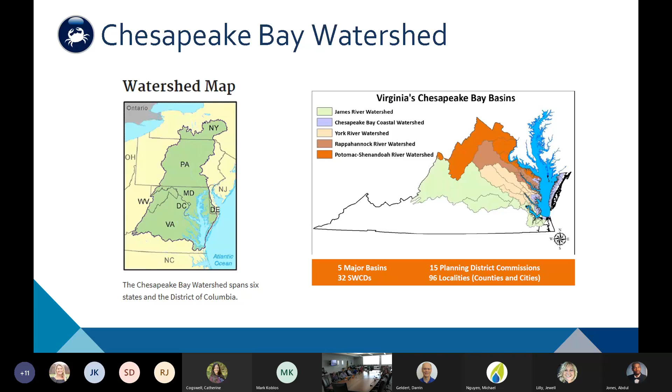When Virginia was given the ability to regulate this, they did it through a general permit for the state, and all wastewater treatment plants are given an allocation in that permit, with requirements on how they're going to monitor your nitrogen and phosphorus discharge, what kind of reporting you have to do, and how you might handle changes in your flows or loads over time. Every 5 years they renew this general permit, and as part of that, we had to provide a nutrient offset plan - our plan submitted to them. Everybody had to resubmit it at the 5-year renewal on how we're going to meet our waste load allocation.

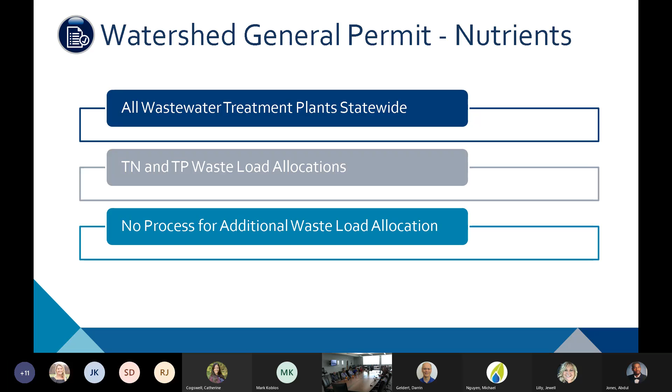That nutrient offset plan is also required if you're going to expand your plant. So if you're saying you're going to discharge more wastewater, they have a process that asks what's your plan to meet your waste load allocation. But there is no process to get more load allocation - it's how are you going to discharge more flow within the existing pounds of nitrogen and pounds of phosphorus you have. And this is really the struggle for Broad Run.

Right now we were given a waste load allocation based on 11 MGD flow, and this is truly flow discharged through the plant into the Potomac, so it's minus anything we're diverting to reclaim. Our plant right now has an 11 MGD capacity, but we discharge about 6 MGD. We're taking in about 8, but on average, anywhere from 2 to 3 are going to reclaim. So we're really nowhere near discharging our current waste load allocation, but we're building expansion to 16.5.

So DEQ has already asked us, well, how are you going to treat to these nutrient levels? Because we're going to allow you to build this. So we want to know how you're going to reach a 2.67 and a 0.067 on TP. Now, the state in regulation defines state-of-the-art technologies as a TN of 3 and a TP of 0.18. So we've already acknowledged to the state that Broad Run is exceptional, and yes, we feel like we have everything in place to meet this equivalent concentration, which we wouldn't have to do until we actually discharge 16.5 MGD. That is well into the future, but they wanted to know our plan when we built it.

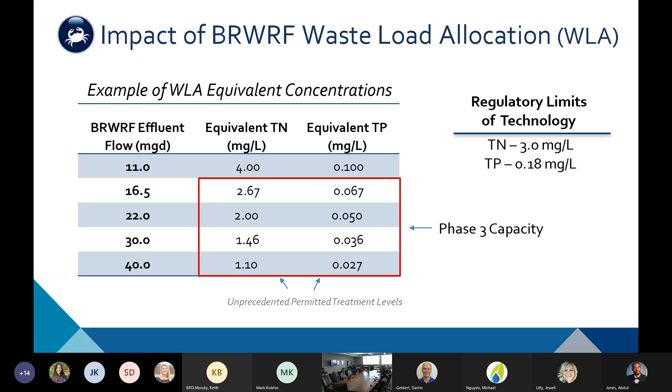We do think the timing is better than perfect. He's been trying to get this done. He's just so brilliant, forward thinking. He understands all this, he knows the area, he knows the region. What a perfect person to have there for a discussion like this. Just perfect. But you have to get through the staff to get to them. So we know how to do that.

I do have a question about the nitrogen. You mentioned organic nitrogen. So sitting here, we're surrounded, the atmosphere is 80% plus or minus nitrogen. So what kind of nitrogen are we talking about? Nitrogen compounds or free nitrogen?

So the permit is total nitrogen, and as the speciation of that is broken into ammonia, and then a small fraction that comes into a wastewater treatment plant as organic nitrogen. Most of what we focus on is dealing with the ammonia and particulate nitrogen. In the end, we convert that ammonia into nitrogen gas. We don't ever destroy nitrogen, but that's what we do. We go through a process that releases it into the air because it's no longer in the water, so the water can come out clean. That organic nitrogen is not part of that normal wastewater treatment process.

We do remove some of it because we have the granular activated carbon, and that is absorbing some of the organic nitrogen, but it is not enough to get our total limit down to anywhere below 1.5. And now that 1.5 still has a tiny bit of ammonia, like 0.1 or 0.01 on some days, a tiny bit of nitrate still left, but those add up real quickly into things that are 1 milligram per liter, because it's just such a low limit that you're having to hit almost down to 0, which is always where things get impossible.

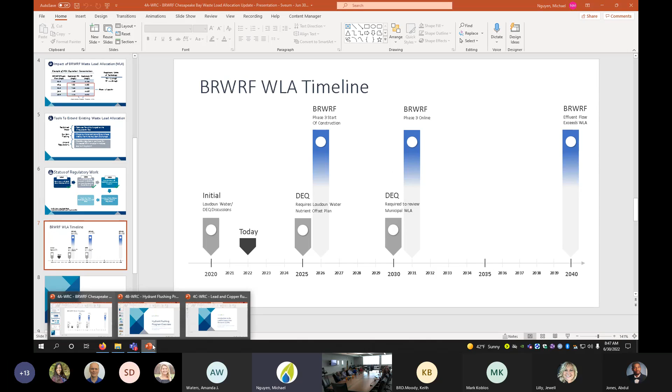I'll have a little more of a lighthearted presentation for you, which I think is a pretty fun one. So I'm going to share some information about our hydrant flushing program.

This is one of the most fundamental preventive maintenance programs that any water utility would have, just the most common type of program out there. But there's a lot more to it than meets the eye. So I'm going to share with you a little bit about this program.

So when most people think about water hydrants, they think about fire suppression, which is absolutely one of the most important uses of hydrants. But there are a lot of other reasons that these hydrants exist as well, and a lot of that has to do with our water quality.

As we're going through the flushing process every year, we are removing sediment from the line and testing the water quality as well. So this is a really important process for the quality, as well as ensuring that we've got the right amount of flow and water pressure to support not only fire suppression, but also our customers' needs and having the service that they need for their homes and businesses.

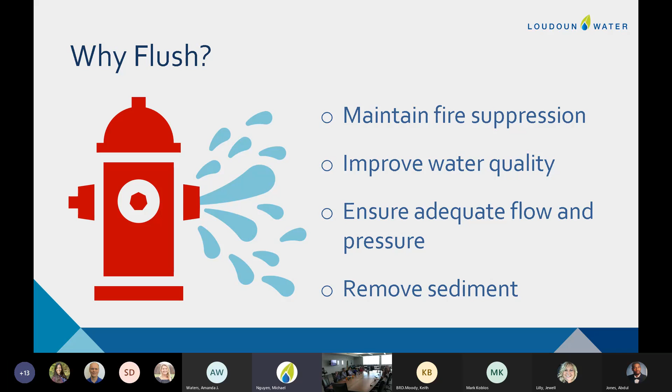One of my favorite things to do every year is find Scott on my street flushing my hydrant. This was something I was able to discover in person over COVID, which was kind of a bonus, being able to chase the trucks down the street and see what's going on. It's kind of like the ice cream truck coming for kids, but for me it's the Loudoun Water truck, and I get a lot of excitement there. So Scott's here flushing the hydrant, which is really fun. If you haven't seen this done in person, definitely chase them down if you see them. It is a lot of water, but it's for a good purpose.

So this video was really to give you an idea of what the hydrant flushing process looks like. There's a number of different steps that are really important when they're doing the flushing. The first thing they're going to do before they even open the hydrant is inspect it for any visual defects, making sure the bolts are secure and in good condition. If it needs to be painted or shows any other obvious signs of damage, they're going to inspect that and report any problems they may see.

They're also, as they're opening it, going to lubricate all of the threads. This is really important because if there is an emergency fire suppression need, for example, we want this to open and close easily and have the access that we need to the hydrant.

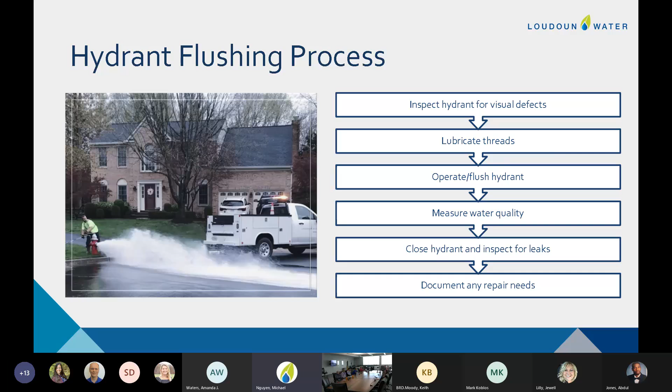So that was really the fun part with what it looks like. But I do want to share that we've got a lot of great tools behind the scenes that help us, when we're not there in the field, to understand how the program's working and to plan our resources. So we've got some great technology to support us. Our preventive and corrective maintenance activities are all stored in SAP, and now thanks to Power BI, we've got the ability to take a look at that data more easily and get good visual information a lot more quickly than we have in the past.

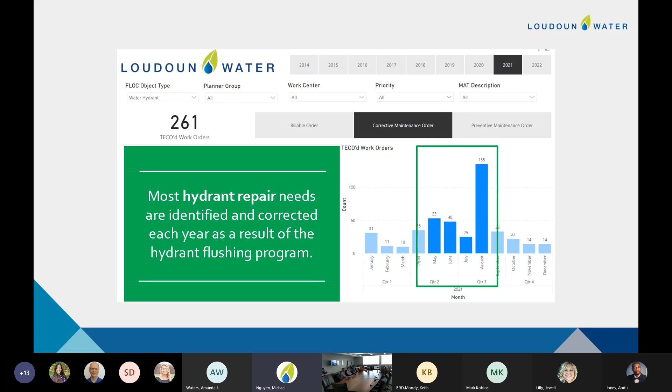We were able to get this done a little ahead of schedule this year, which was pretty exciting and a lot of fun, watching our progress move up every day, even having little internal contests to see who could flush the most hydrants. So we've got some top flushers, and we even have another board that shows the all-time high over all the years, who's the top. It's a pretty prestigious award and just a fun way to get excited.

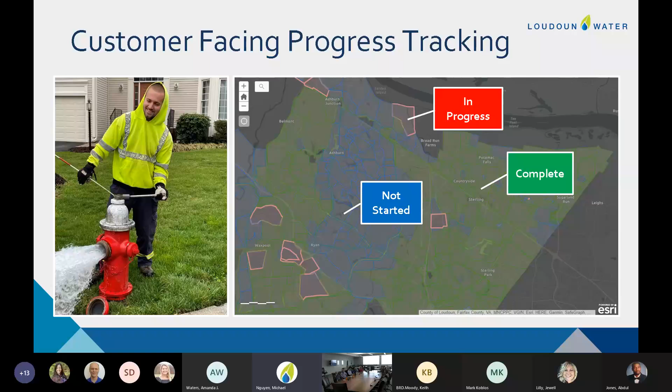Also great for our customer relations team to field questions that may come in through phone calls, to quickly be able to identify where our teams are. So also on the website, we keep frequently asked questions out there.

I would say these are definitely the most common ones that our crews get when they're out in the field, that I see on social media when people say, does your water smell like chlorine today? There's always something going on, so this really addresses the questions that are out there.

Just in case you're unaware of any of these answers, will flushing affect my water? No is the simple answer. If there's a team that's out on your street, you could have a minor blip in pressure fluctuation, but it's super temporary and doesn't affect anything that you're doing.

The chlorine odor and taste, some people are more sensitive to that than others, but we do change the chemicals from chloramines to free chlorine during the flushing season, both us and Fairfax Water. It just has a stronger smell and taste that's less desirable, but it's perfectly safe and a temporary measure to make sure that the pipes are disinfected during the process.

Sometimes you could have some air bubbles in your water if there's flushing going on and the water's all mixed up in your street. But that's super temporary as well, perfectly safe, nothing to be concerned about.

And the cost of the water that's being flushed is built into our normal operations and user fees, so you won't get an extra bill when all that water's pouring out on the street.

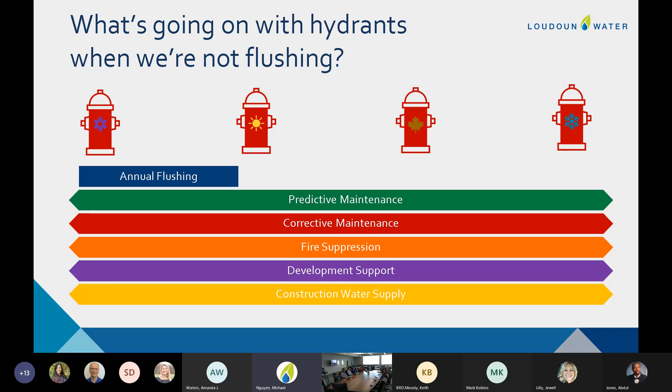Fire suppression, when we all know about development community support - we were talking about water pressures. So when new development occurs, we do hydrant flow testing in the area and check the pressure and make sure there's adequate pressure and flow for that community before it's finalized. We also have a construction water supply program where contractors can rent meters and have designated hydrants where they can get water for construction purposes, and they get billed based on what's metered. That's all I have on the hydrant flushing presentation.

I have a couple of fun pics of some of our team members that are out there every day working hard on hydrant flushing. We did a little ice cream party celebration once we finished this year. These guys are so helpful and so willing to talk to you and answer your questions. If you see them, say thank you and ask them any questions you want - they love to talk about what they do. They're really proud of the work they do and they're really great at it. No one's more knowledgeable than these guys out there every day. Definitely take time to say thank you if you see them.

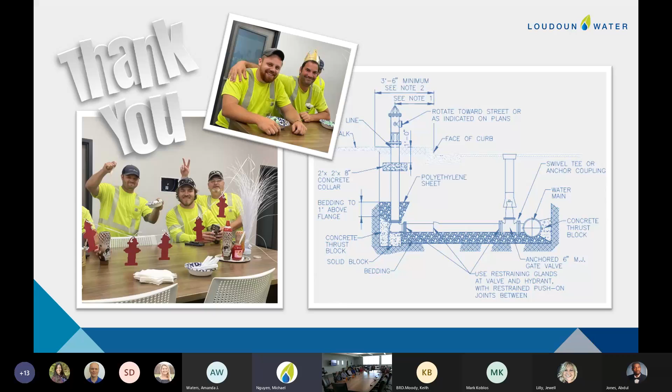We will, thank you very much. You're very welcome.

Presentation created a lot of discussion. So we're done flushing for the year?

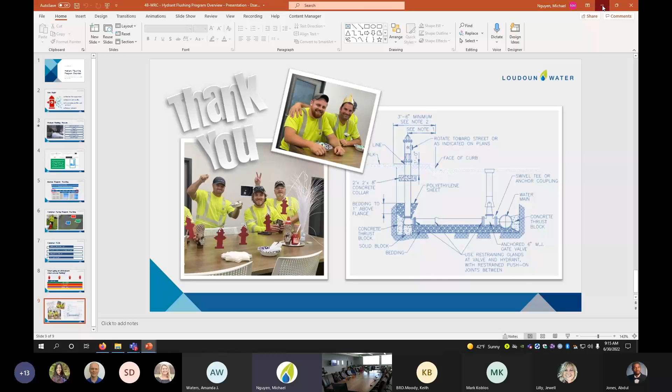Yes, and it's not even July yet. June 10th is when we finished. Is that normal for us? We're done, we finished a couple days ahead of schedule. We're normally done mid-June, something like that. Okay, get ready for the next big program. That's great, thank you very much.

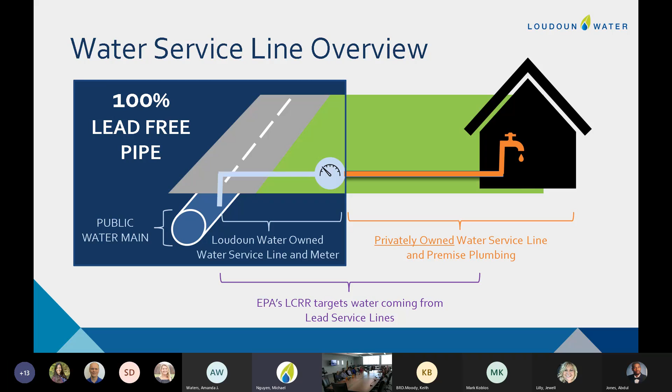So with EPA's lead and copper rule revisions, they are looking at the entire service line, not just Loudoun Water's portion. We're thinking about all the way to the premise, including the privately owned portion. That's important to keep in mind. So how are we going to know that? We'll get into that—we're working on it, we've got some ideas.

So I'm not going to go into huge detail here, but just a little history on lead pipe. A few things I'll point out: the Safe Drinking Water Act was amended in 1986. This was a big date—this is when federal law banned lead in the drinking water. So lead was banned in 1986.

Virginia follows the U.S. Building Code or Plumbing Code, and that code was updated in 1990 to say the maximum amount of lead content in pipe is 8%. So it's pretty safe to say that anything built after 1986 is not lead, but after 1990 is a more conservative date—if it's built after 1990, it probably doesn't have lead because of these rules put in place in the building code.

In 2021 was when the lead and copper rule revisions were released, and this really focused on lead service lines, getting lead out of pipe. Our compliance deadline with the requirements I'll share is October 16th, 2024.

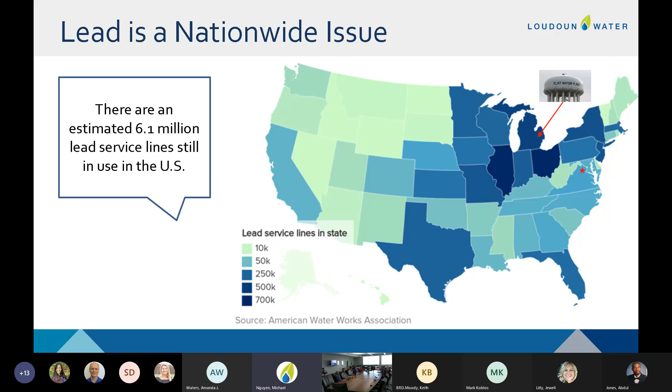There are three high-level goals of the lead and copper rule revisions. The number one being to protect children, schools, and childcare facilities. The research has shown that lead in drinking water is most harmful to that population. So there's going to be increased testing, increased frequency and levels of testing at early childhood centers and elementary schools in particular, as part of this rule.

The second goal is to simply get the lead out of our nation's drinking water, emphasizing replacing the lead service lines that do exist and improving our testing.

So we're moving from a 1 liter or first liter sampling to 5th liter sampling to test for lead in the drinking water. Instead of targeting the premise plumbing - which the first liter looks for - the 5th liter is looking at the entire service line, and is a better detector.

So that's going to be one of the changes that'll take place as part of this rule. And then the final goal is to empower our communities with more information.

They're going to have a whole lot more information at their fingertips than they've had before. Service line inventories of what service line materials they have is going to be publicly available. We're going to have more information published to explain where lead comes from, what are the harmful effects, how can you protect your family, and so on. So a lot more information is going to be distributed to the community as part of our requirements, and then just in general what EPA is trying to do as part of this rule.